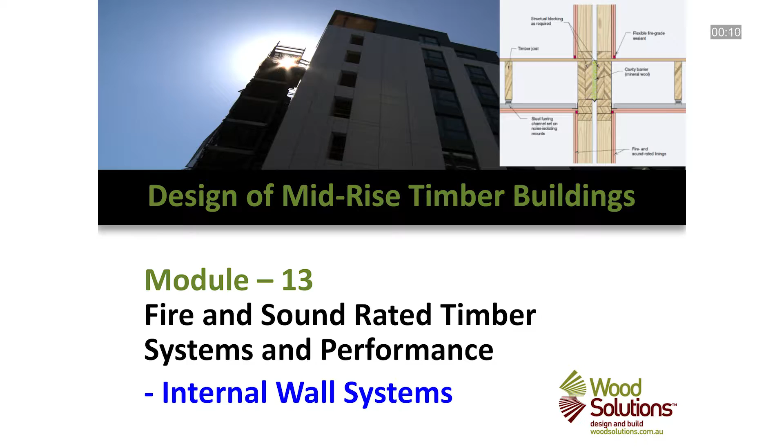In this module, we will examine some typical fire and sound-rated internal wall systems and how they perform, and also what measures can be taken to improve performance above minimum code requirements.

The two main timber wall construction system approaches are either lightweight timber systems or massive timber systems.

The minimum NCC sound and fire requirements for walls are as follows. For Class 2 and 3 residential buildings and Class 5 office buildings, an airborne sound rating greater than 50 and an FRL of 90-90-90 for Class 2 and 3 residential buildings for both general and massive systems. And for Class 5 office buildings, an FRL of 120-120-120 for general systems and for massive systems.

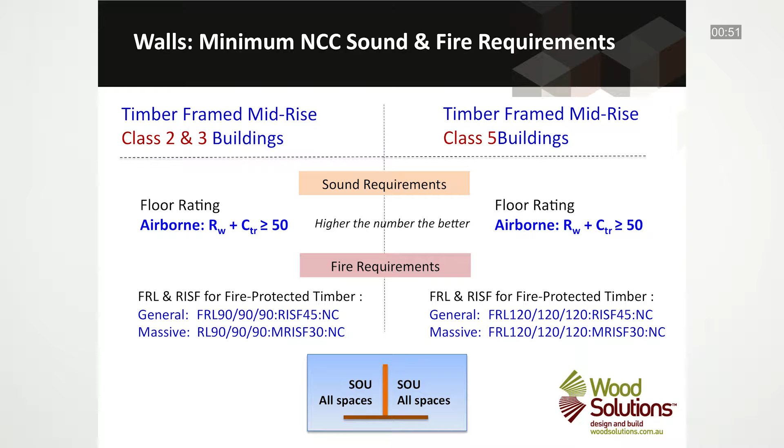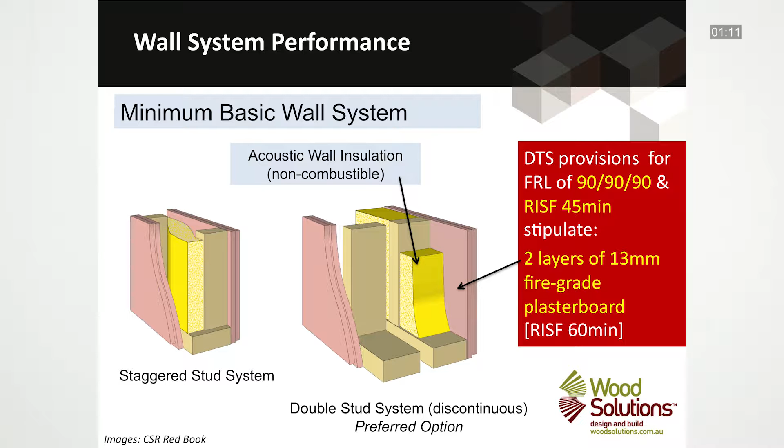The DTS provisions for an FRL of 90-90-90 and an RISF of 45 minutes stipulate the use of 2 layers of 13mm fire-grade plasterboard. To achieve the acoustic performance, the wall will need to utilise either a staggered stud system or a double stud system, known as a discontinuous wall, with a 20mm minimum gap between the walls.

This latter system is the preferred option due to its more superior acoustic performance.

Looking at the configuration shown here, you can see if no cavity acoustic insulation is used, then the system does not meet the NCC airborne requirement, so the system is not adequate. If R1.5 or greater non-combustible insulation is utilised, however, you can see that the system now meets the airborne requirement greater than 50 and is therefore adequate with all the different stud depth options shown here.

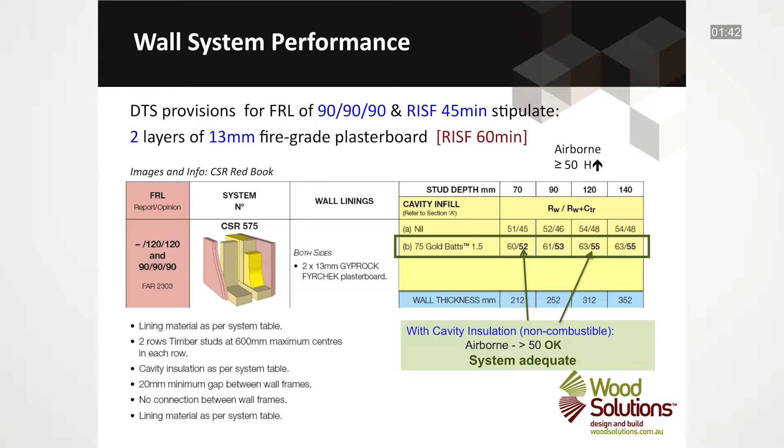When utilising a massive timber wall system, it needs to be noted that these are proprietary systems and therefore FRL and acoustic performance information should be sought from the supplier.

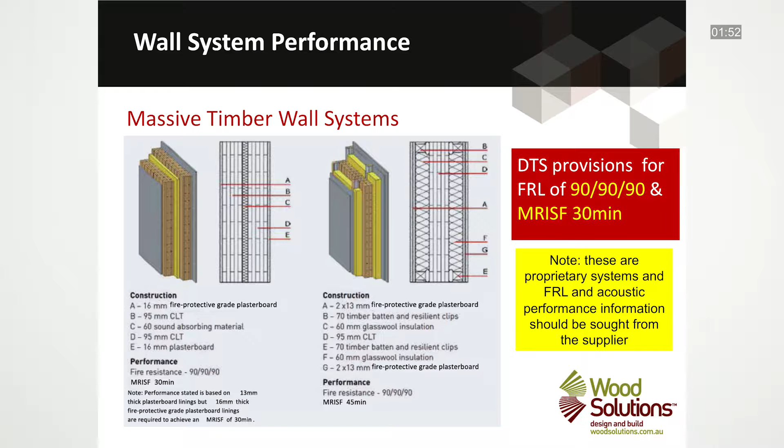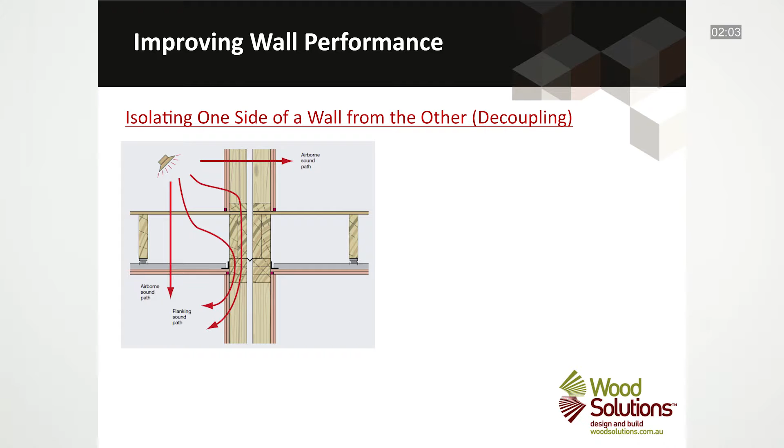There are a range of ways that the acoustic and sound performance of wall systems can be improved. Isolating one side of a wall from the other, or decoupling, reduces both airborne and impact sound and serves to limit noise vibration from one side of the element to the other, providing major reduction in flanking noise. That is the sound passing around rather than through wall or floor elements.

It should be noted that decoupling is a specific requirement of the NCC DTS provisions for plant and lift shafts and SOU rooms adjacent to certain neighbouring building spaces, such as kitchens and bathrooms.

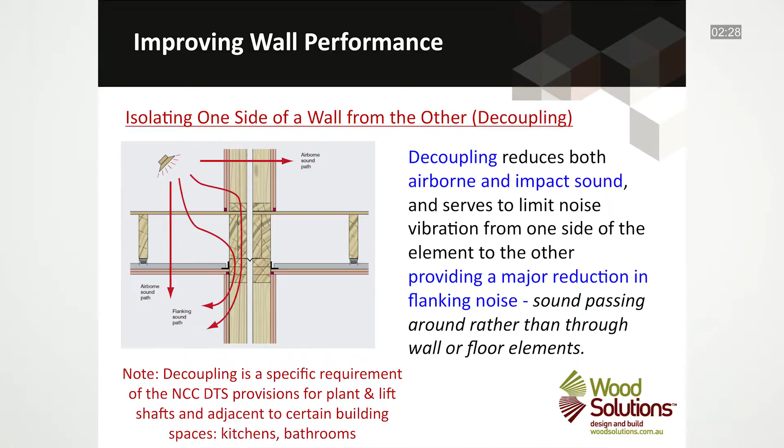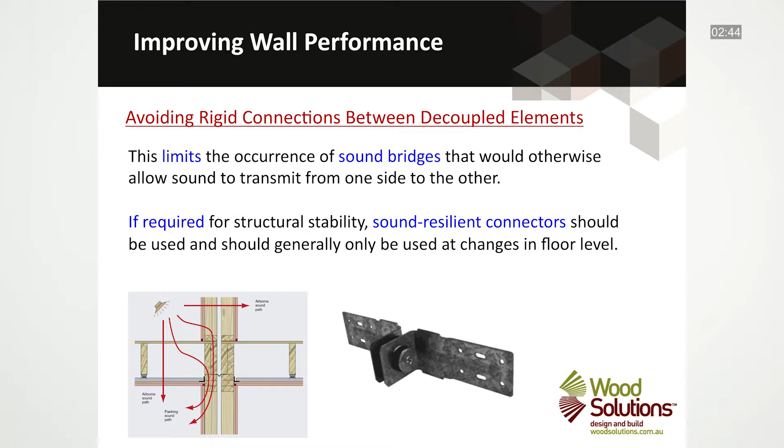When using decoupled wall systems, it is also important to avoid rigid connections between the decoupled elements. This limits the occurrence of sound bridges that would otherwise allow sound to transmit from one side to the other. If required for structural stability, sound-resilient connectors should be used and should generally only be used at changes in floor level.

A recommended approach to minimising structural flanking at wall intersections is to fix the plasterboard linings to the timber studs using furring channels on sound-isolating resilient mounts.

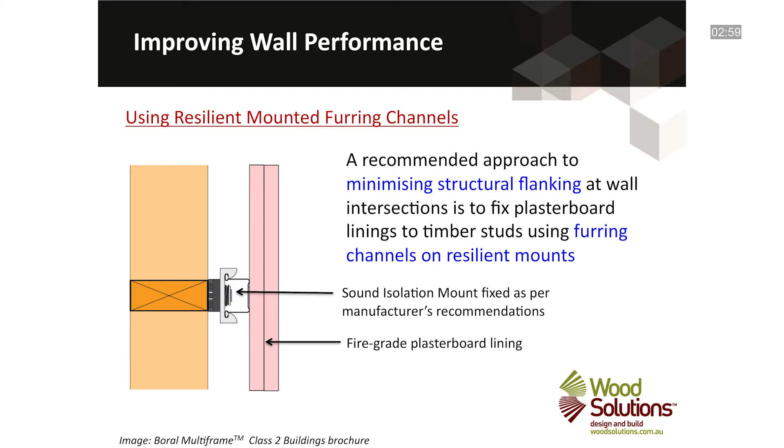Increasing the mass of the wall linings using additional layers of fire-grade plasterboard also provides an option. This can be particularly useful in reducing airborne sound transmission.

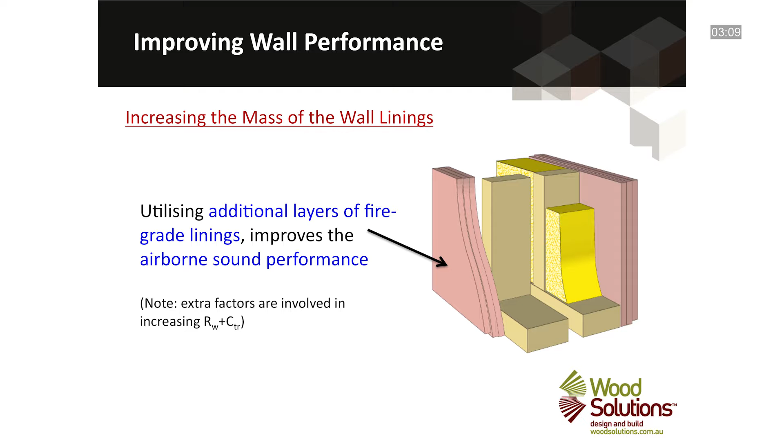With massive timber construction, consider the use of appropriate sound isolation pads between wall and floor elements to reduce flanking noise. Sealing sound leaks at the periphery of wall and floor elements, or where penetrations are made for electrical and plumbing services, will also improve performance.

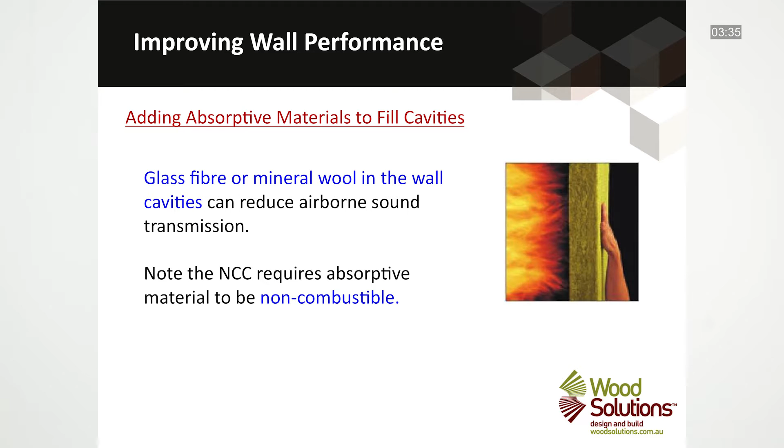Adding additional glass fibre or mineral wool in the wall cavities can also reduce airborne sound transmission. It must be noted though that the NCC requires all insulation materials to be non-combustible.

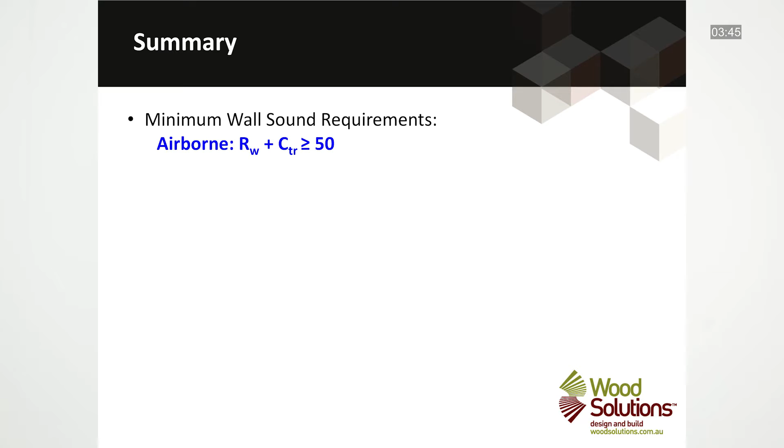So in summary, the minimum NCC requirements for wall systems are an airborne performance greater than 50. Ways to improve sound performance of wall systems include decoupling using double wall system, avoiding rigid connections between decoupled elements,

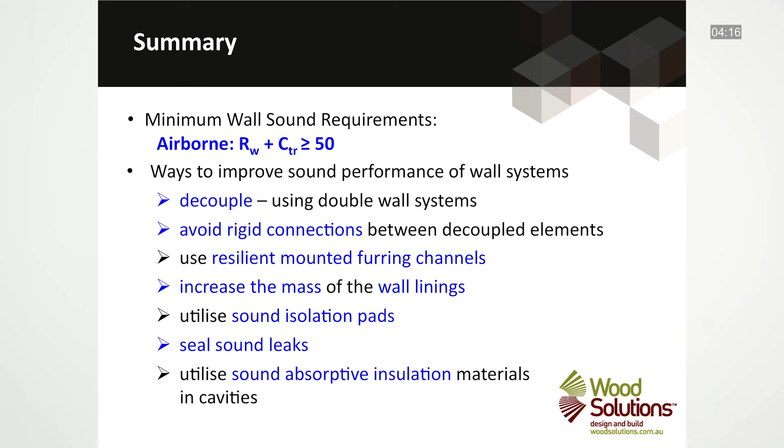using resilient mounted furring channels to fix the plasterboard, increasing the mass of the wall linings, utilising sound isolation pads between massive timber floor and wall elements, sealing any sound leaks at the periphery of wall and floor elements or where penetrations are made for electrical and plumbing services, and utilising higher performance non-combustible sound absorptive insulation materials in cavities.